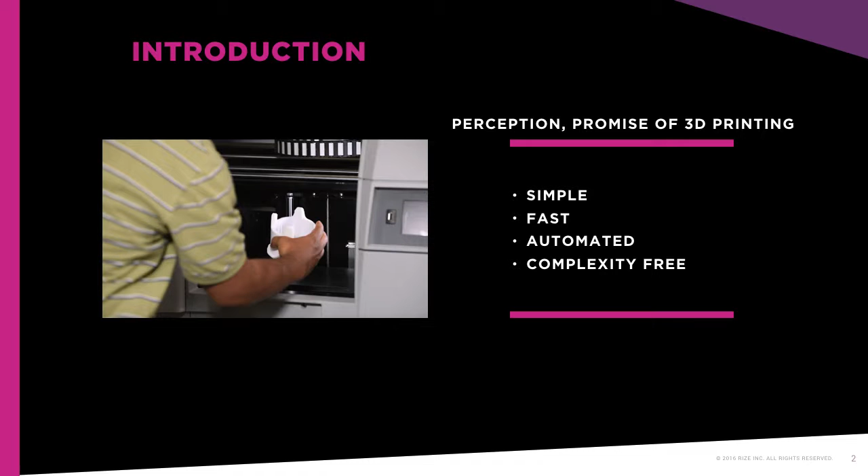A process where complexity is free. That's generally true up to the moment that 3D printed parts are removed from the 3D printer. As soon as parts enter the post-processing phase, the automated push-button process becomes a manual operation that impacts time, cost, and quality.

New 3D printer users are often shocked to discover what's really required to make 3D printed parts usable following printing. Longtime users, on the other hand, tend to accept post-processing as a necessary evil.

Since all other 3D printing technologies require post-processing, experienced users accommodate the added burden and make operational adjustments.

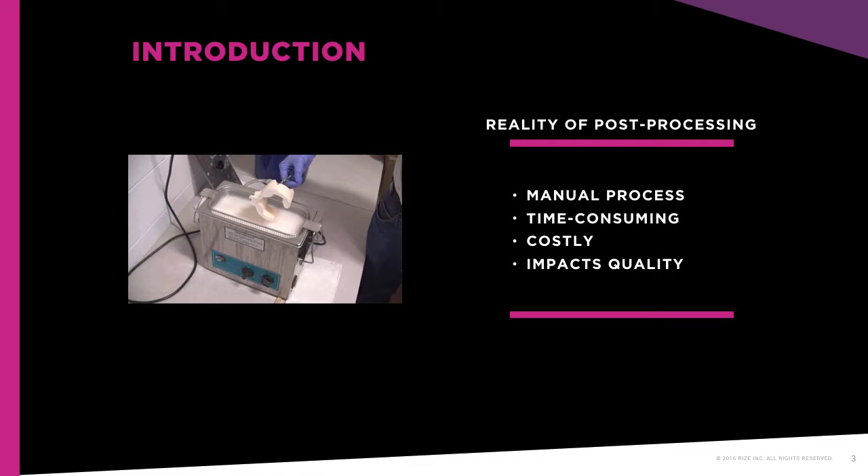Post-processing is a non-value-added process that increases overhead and imposes limits. It complicates the 3D printing workflow, adds expense, and extends delivery time.

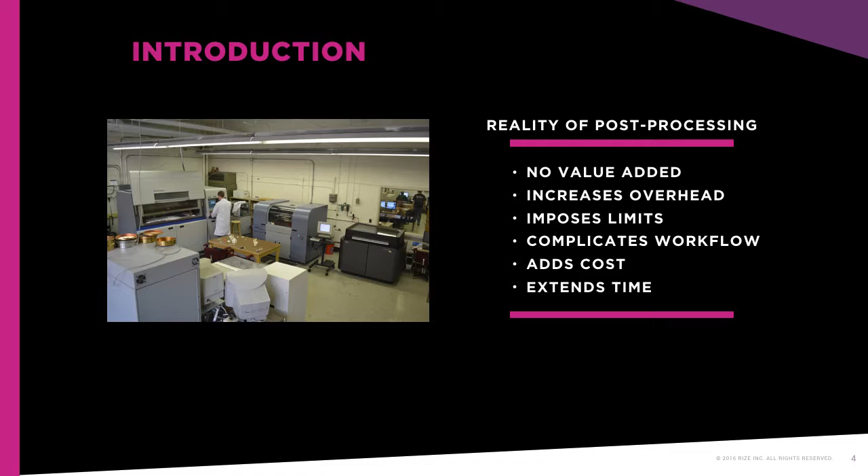For the 3D printing lab, where operations are centralized and run by a dedicated staff, this is certainly undesirable. But for the office environment operations, it's downright unacceptable, making it a technology that's best suited for the lab.

Rather than being a hands-on convenience for engineers and designers. Ultimately, the burdens of post-processing are an impediment to expansion by current users and an obstacle to broader adoption.

By those that have yet to establish in-house operations. This non-value-added process limits the frequency of 3D printing use, the viable applications, and the markets that are served.

In the context of 2D printing, post-processing is analogous to the steps needed to prepare multiple copies of a report when printed on a basic desktop printer. The job isn't finished when printing is complete.

Prior to distribution, the pages are collated, 3-hole punched, and inserted into a binder. This manual operation adds time and cost.

However, a better analogy is to photography. The perception and promise of 3D printing is a process similar to digital photography. The moment after taking a picture, the images are ready for distribution.

The reality is that 3D printing is more like film-based photography, where the photographer develops the images in a darkroom that houses equipment and chemical solutions. During development, the resulting photo quality and image effects are controlled by the photographer.

Contrary to the 2D printing analogy, which adds only time and cost, film photography also requires floor space, equipment, and skills. Time, cost, equipment, floor space, and skill are the hallmarks of 3D printing's post-processing phase.

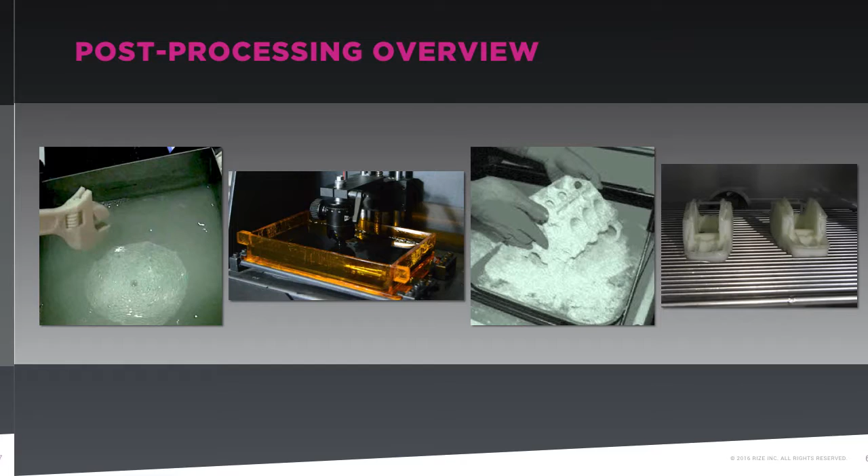Secondary post-processing includes optional part finishing that improves the aesthetics or function of the part. Most commonly, secondary post-processing includes sanding, filing, priming, and painting. However, it can also include machining or plating, for example.

6 companies contributed their post-processing experiences. These companies represent the automotive, consumer products, medical device, sporting goods, and architectural industries.

I can tell you that 2 of these companies were Reebok and Newell Rubbermaid. We've been asked by the other companies to exclude their names, although rest assured, you'd immediately recognize all of these brands.

Each noted that the post-processing time and required resources varied by technology and part, yet they kindly reported their typical demands.

The time impact: according to these companies, prospective users should plan for 1 hour of post-processing for every 1 to 6 hours of 3D printing. This translates to a 17 to 100% increase in the total process time.

However, the total elapsed time will often have a much larger increase, as we discuss later. All of the companies noted that time is dependent on the intricacy or the complexity of the part. For example, small intricate parts take longer to post-process than large simple parts.

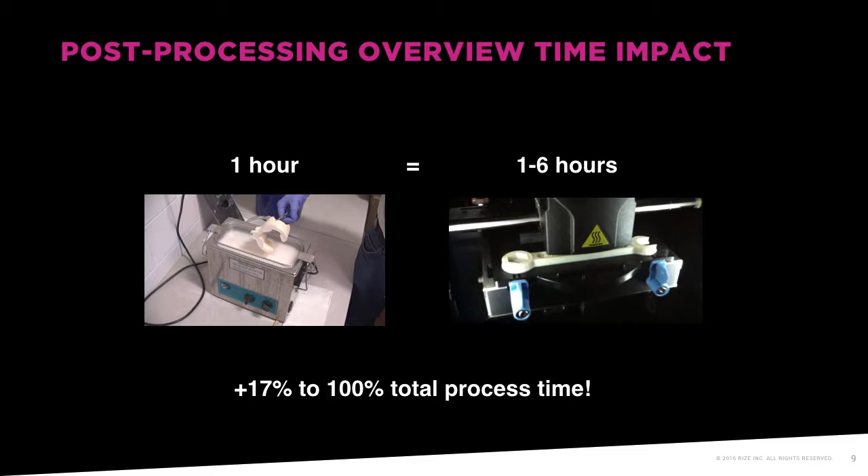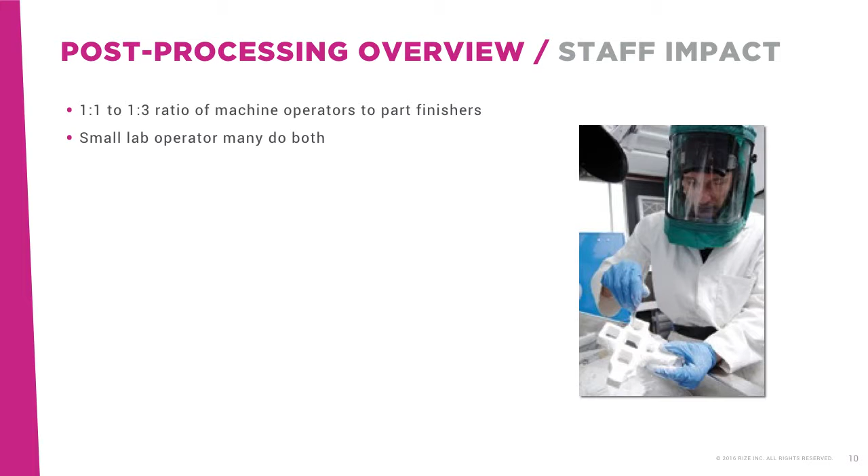The staff impact. Staffing is another consideration for prospective users. The companies reported that the ratio of machine operators to part finishers, the employees that do the post-processing, ranges from 1:1 to 1:3. For smaller labs, an operator may split his or her time between file preparation, machine operation, and post-processing, which means there's a labor cost, but no added wage expense in the budget. But once total throughput reaches a level where a single individual cannot perform both functions, additional staff will be required.

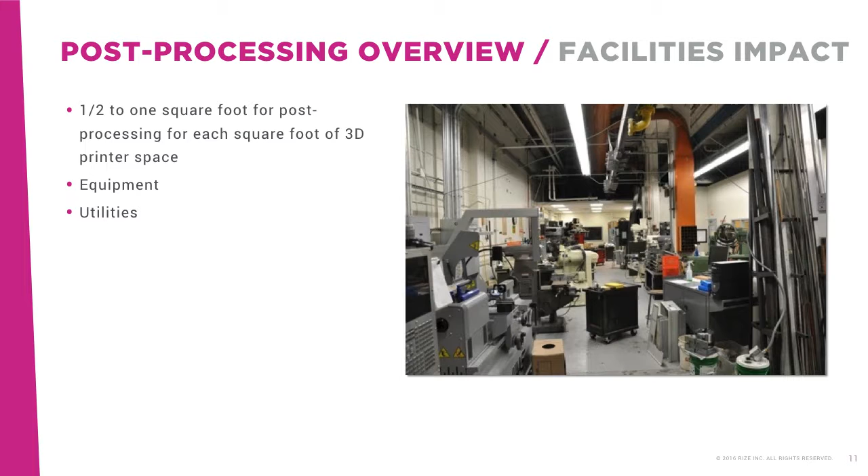The facilities impact. Facilities must also be considered, when providing ample room for required equipment and workspace to conduct post-processing. These companies report that they have floor plans that use 1/2 to 1 square foot for post-processing for each square foot of 3D printer space, plus equipment and utilities.

Let's talk about the primary issues experienced by those 6 companies. It comes as no surprise that the biggest issues with post-processing are the added cost and the added time, which could be quite significant. Both time and money were noted by the 6 contributing companies as their primary concerns. Yet the ranked priority for each varied and was driven by the current climate within the businesses.

For example, cost was secondary for those that urgently need to accelerate delivery of 3D printed models and prototypes. The business climate and corporate goals also influence the perceived impact of post-processing. For example, the wages paid for post-processing labor were viewed as a barrier to advancement and innovation, a throttle on total production, or a drain on financial resources. While the negative effects of post-processing are universal, the implications of this required step are interpreted through the lens of the organization's current challenges and goals.

The cost impact. Post-processing adds cost to 3D printing operations in a number of ways, but the most cited aspect is labor cost. Using a fully burdened labor rate, the companies reported an hourly cost of $30 to $100. With 4 to 10 3D printers, the annual labor cost, fully burdened, ranged from $100,000 to $500,000. This equates to a direct labor cost for post-processing of roughly $25,000 to $50,000 per year per 3D printer.

A key benefit of 3D printing is speed, so anything that slows the process is undesirable. Although a single part may be post-processed quickly, the aggregate effect can extend lead times by days or even weeks. As the contributors shared, post-processing adds 17 to 100% to the 3D printing time on a batch-by-batch basis. What those numbers don't reflect is the full impact of this manual bottleneck operation on schedules.

A few hours of post-processing can translate to a 24-hour delay, even with a well-staffed operation. When compounded across multiple design iterations, the delay can be measured in weeks.

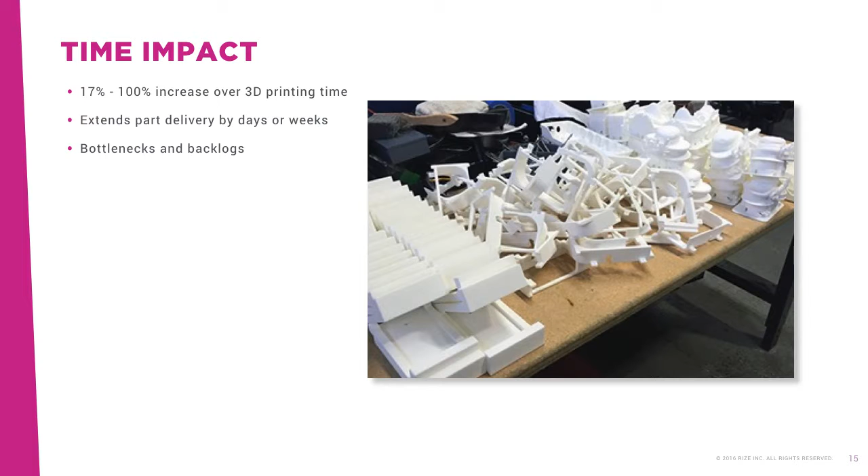At Reebok, a typical build time is 8 hours for its material extrusion process. The 3D print jobs are then followed by post-processing, which may include a 4-hour soak to dissolve the support structures. This semi-automated step adds 50% to the total process time, but the total elapsed time to deliver the part can increase by 350%, turning a 1-day delivery into 2.

According to Gary Rabinovitz, the company's RP lab manager, post-processing can add another day to the schedule, which means that the design review and release of the next design iteration are also delayed.

For example, if a file is received in the morning of day 1, the build could be launched at 9 a.m. With an 8-hour build, 3D printing finishes after hours at 5 p.m. Support removal starts first thing in the morning on day 2 and finishes at noon. This 8-hour print has a 36-hour turnaround, even if the schedule is wide open and staff is available.

Of course, a second shift could accelerate the process, but as discussed earlier, that second shift would add an expense that budgets might not support.

Without post-processing, delivery and design iteration could occur 1 day sooner. The cumulative effect over multiple iterations may extend a week or more, as one consumer products company noted.

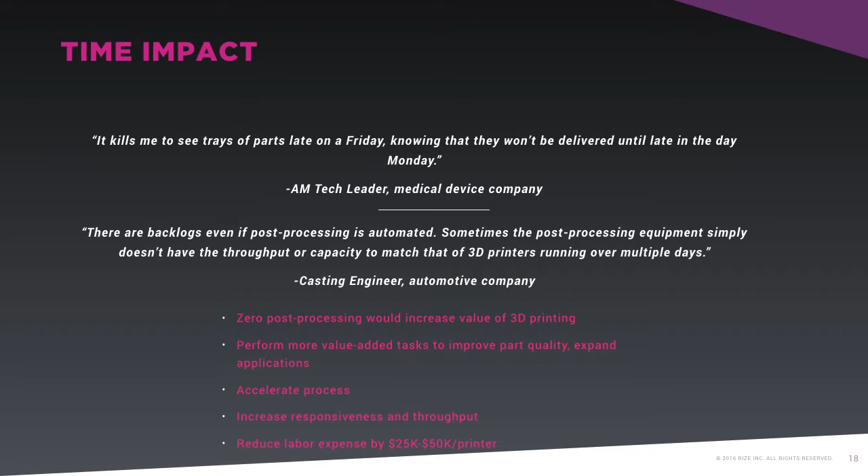For those adding new 3D printers, eliminating post-processing would reduce labor expense by $25,000 to $50,000 for each machine. However, post-processing's burdens don't stop with labor cost and total process time.

Post-processing's impact is far more widespread than the cost of labor and the delays on schedules. While considered secondary issues by these six companies, the impact on quality, staffing, facilities, and safety can't be ignored. First, quality: ultimately, the quality of 3D printed parts is in the hands of the part finishers who wield X-Acto knives, sandpaper, and spray nozzles for media blasting or water jetting.

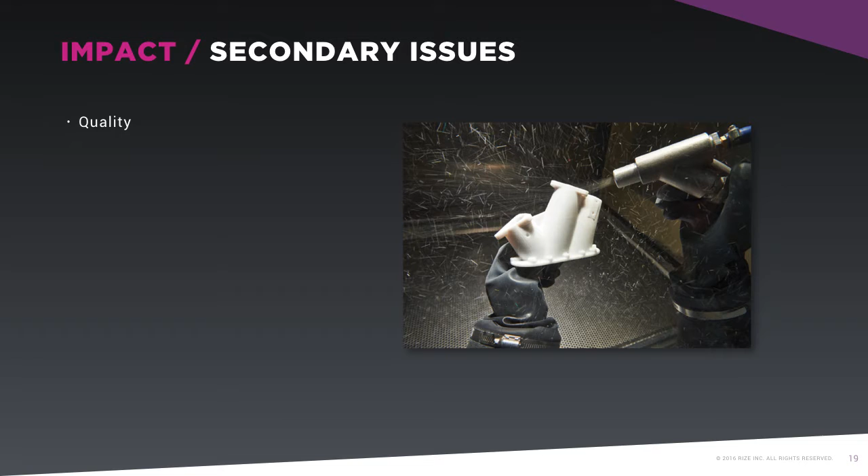The medical device company noted that maintaining consistency and accuracy across many copies of the same part is difficult when manual labor is involved. For intricate parts with delicate features, a consumer products company said it often opts to build a duplicate just in case the original is damaged or broken. But making duplicates increases cost and consumes valuable 3D printing capacity.

For those that have the budget to hire post-processing personnel, the issue of staffing becomes one of finding the right talent. According to a consumer product company's engineering manager, post-processing is kind of an art form. Part finishing requires a unique skill set and a unique personality. To maintain the quality of the 3D printed part, the post-processing personnel must have model-making skills, manual dexterity, and experience with the tools at their disposal.

Yet they must also demonstrate those skills while under intense pressure to deliver rapidly. Of the entire labor pool, only a small percentage possess this combination of skill and temperament, which complicates the hiring process.

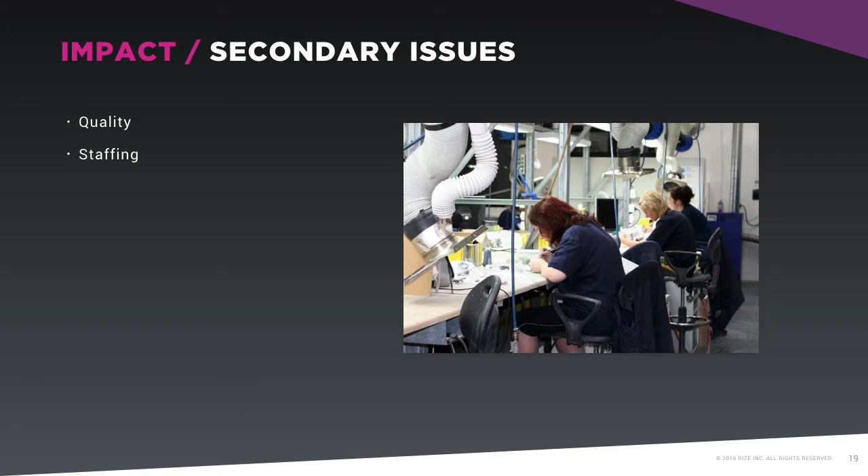Floor space is required to house the staff, workbenches, and post-processing equipment. As we stated earlier, a ratio of one-half to one square foot per square foot of 3D printer space will be needed in many cases. This space can be an impediment for those that don't have the option to expand into existing areas, an expense for those that have to take on construction, or an ongoing cost for those that have internal cross charges for floor space used by the department.

Another cost consideration is the purchase of the workbenches and equipment, which will run into the thousands of dollars for the typical, yet small, 3D printer lab. There's also the additional cost to run utilities, like electrical, water, and air lines, to the equipment.

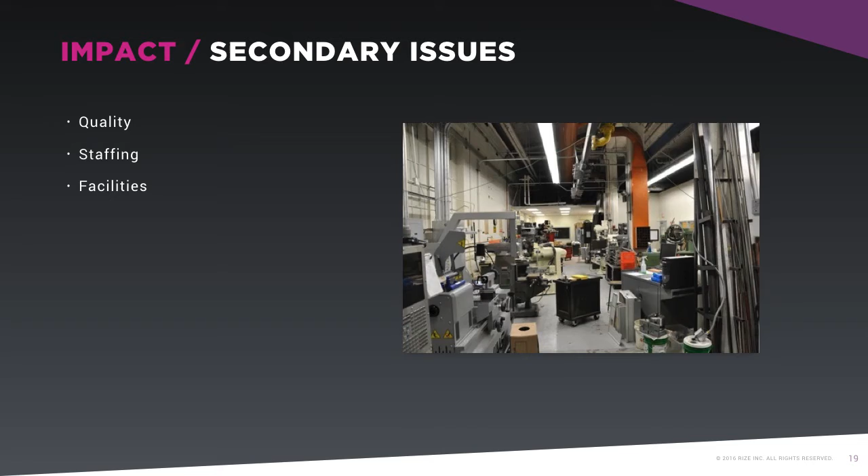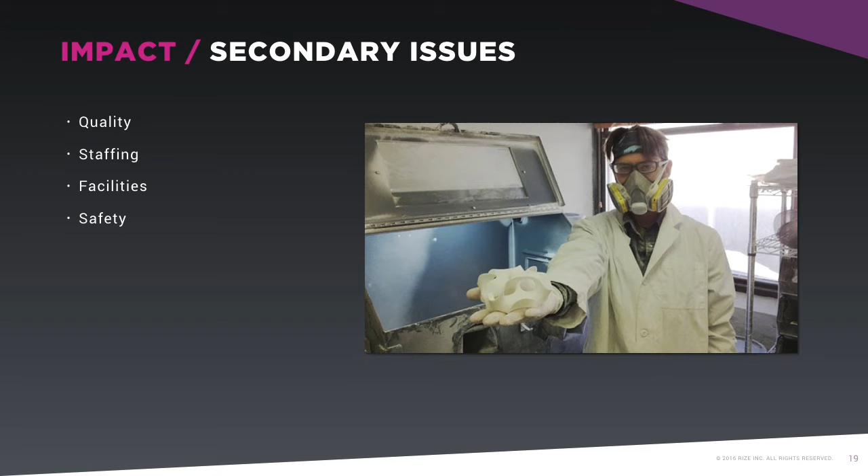Safety. Safe operations, safe handling, and safe disposal are sources of hidden costs that many don't account for until after the implementation of the 3D printer. According to the medical device company, the organization has a rigorous safety program, which means more safety resources are required for each employee added to the post-processing staff. Additionally, it noted that the 3D printing operation is the largest generator of hazardous waste in its entire R&D facility. Proper disposal of hazardous waste generated during post-processing is quite costly.

In a lab environment, the issues and limitations created by post-processing are impediments to throughput and part quality, as well as a drain on budgets and resources. In a design or engineering area, these issues are a significant barrier to adoption.

Three of the six companies expressed an immediate desire to deploy 3D printing in offices while maintaining the existing 3D printing lab. The advantage of distributed 3D printing is that a designer or engineer would have quicker turnaround, both for office-built and lab-built parts. Placing 3D printers in the office space, the self-serve model is more responsive because it sidesteps the work queue of the lab. Meanwhile, the lab is more responsive because it offloads the work for basic models and prototypes.

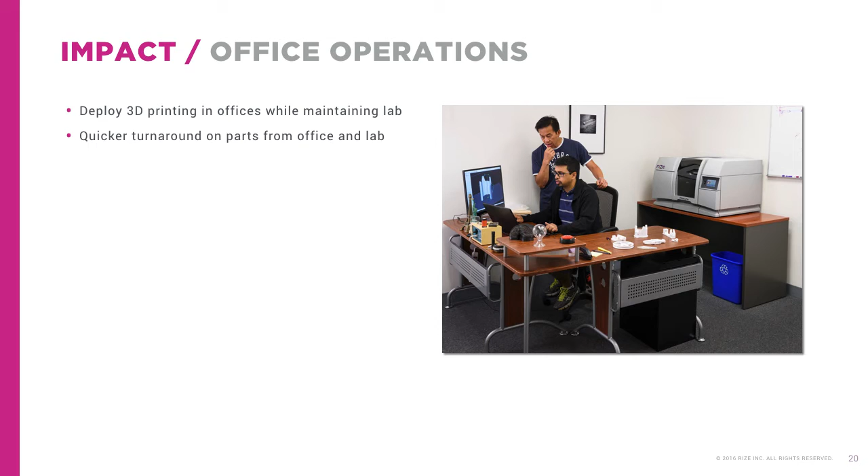Yet all agree that office deployment is not reasonable when primary post-processing is required. The architecture firm cited a messy and unsightly work area. The automotive company cited chemicals and equipment. And a consumer products company cited the high burdened labor rate for engineers to execute part finishing.

For 3D printing in the office to become realistic, it must mimic the workflow of a full-feature 2D printer or digital camera. It becomes realistic when a single device outputs ready-to-use items with no requirement for additional labor, equipment, and floor space. It becomes a viable option when skill, temperament, and safety are no longer considerations.

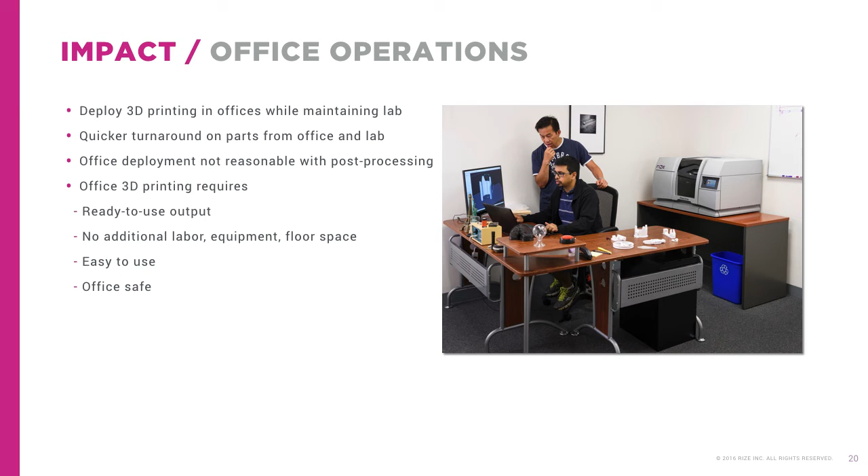Eliminate post-processing, and it becomes feasible to place 3D printers within the work groups that need the models and prototypes. Eliminate post-processing and 3D printer labs become more efficient, more responsive, and less costly. Post-processing is a non-value-added function that's both a burden and a bottleneck.

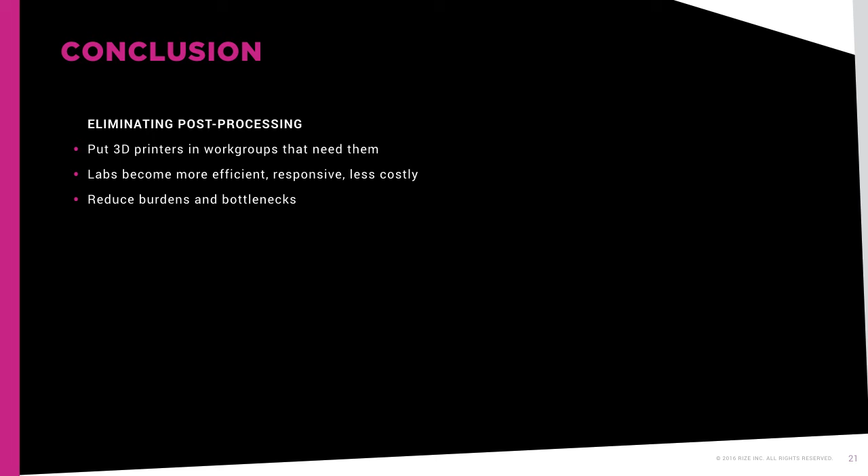Without it, as RIZE has accomplished with our augmented polymer deposition 3D printing technology, the promise of a simple, fast, and automated digital workflow becomes a reality for all parts, whether simple or complex in design. In that new reality, 3D printing adoption will accelerate, and the breadth of applications will expand for organizations of all types and sizes and for every industry and market.